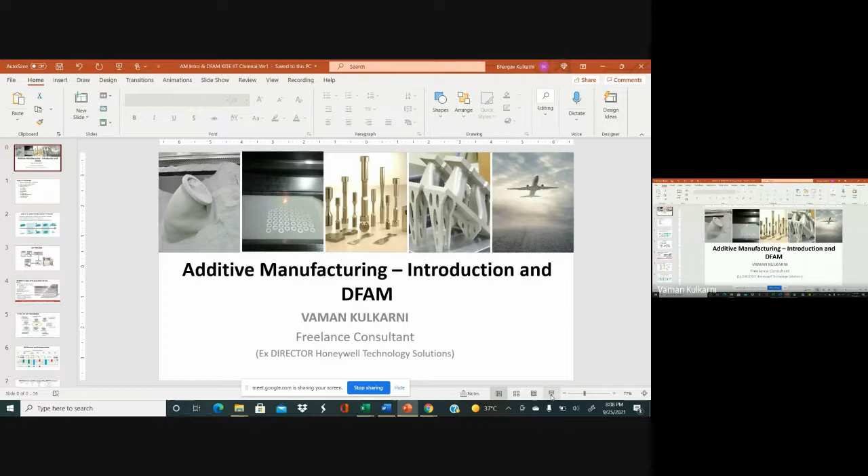In my experience, it was in 93, 94, as part of the Kaveri Engine, we were developing the integrated nozzle actuation system, which has an integrated hydraulic power pack, and it was done through Allied Signal from USA. That is where, in the entire design of a complex pumping system with the housing, additive manufacturing was very effectively used. It's a pump housing with a lot of internal passages and drilled holes to connect them. So it was a very complex part. Multiple times they did the prototyping with plastic material at that point of time, which helped to finalize the hydraulic manifold passages inside that complex housing.

Otherwise, they would have to make that part out of a casting, face the problem, and then go through design iterations to modify it. So really, additive manufacturing at that point of time helped to visualize the part. It is a non-functional part because it is made out of plastic. The original material is aluminum alloy, but it definitely helped in simplifying the design process and cutting down the cycle time. So that was my first exposure to additive manufacturing.

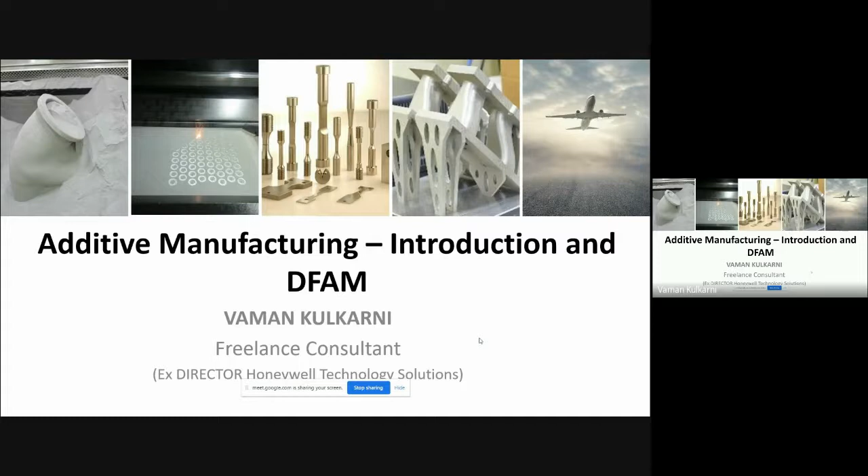Initially, everybody's assumption of additive manufacturing is you just have a machine and the CAD model, you feed the CAD model into the machine, and then you get the finished part. That's what everybody thinks. But as we started looking into it, it is a real technology. So we will get into that and see what additive manufacturing can really do. Definitely there are benefits, there are a lot of applications, but there are quite a few challenges which also have to be dealt with.

So what I will cover in today's topic is we'll briefly look into the additive manufacturing process and what are the benefits and applications. There are different types of AM processes. As I told, initially it used to be called stereolithography, and subsequently we got into laser printing, so we will look into the different types and the materials we can handle, and then applications. Many of the examples I may talk about may be from the aerospace industry because that's where I come from, but they're all very relevant today for other industries, and there are a lot of applications in areas like automobile or the health and medical sectors where it is being very effectively used.

I feel the design for additive manufacturing is very key, especially for the students who are in the call today. They should adapt themselves to additive manufacturing, understanding the design for additive manufacturing areas and the approach they need to follow so that they get the best benefits out of additive manufacturing. And at the end, we'll see what are still the challenges which need to be addressed.

Most of you are aware of the additive manufacturing process. Conventionally, what we do is a subtractive way of manufacturing. You take a raw material and take out material to get to the shape and size we want. But in additive manufacturing, you build the part layer by layer and finally get the finished product. In the process, we are not wasting any material, and you are able to do this directly taking the CAD model as the input. And of course, we need the material with which we are printing. There is a range of materials today: many of the metal alloys, plastics, ceramics, and even composite materials can be printed today with additive manufacturing.

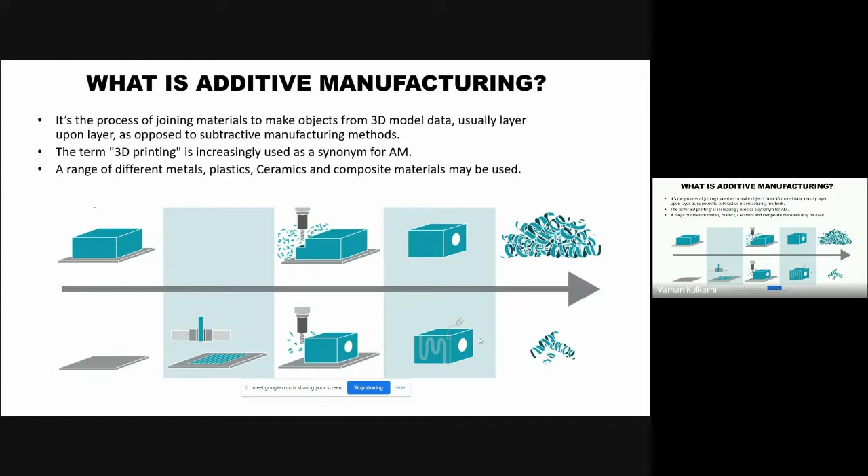The process looks simple, but as I explain it, I will also talk about the complexity involved in each of these process steps. So you have the 3D model, the CAD model you have all been using for creating these models. From the CAD model, we typically have to convert it into a conversion file which the machine interfaces can understand. Most of the machines can understand the STL file. And today there is a very specific format which is for additive manufacturing.

That's the interface which is used. But once we have that file, there is a pre-processing which is involved. This is very, very important. There is a lot of learning which is involved in pre-processing the models. The reason is

as you visualize when printing these parts, they can be printed in multiple orientations. So it can be printed horizontally, it can be printed vertically, or at any other angle. So what is the best way to print this part? That is where the initial pre-processing is involved.

And many of the overhang portions of the component need to be supported, because we are using the raw material, which could be either a liquid or a powder, or even if you are using a solid material, because the way the part is produced, it goes through the different phases of the material. So it needs to be supported. What is the best way to print that part with minimum support?

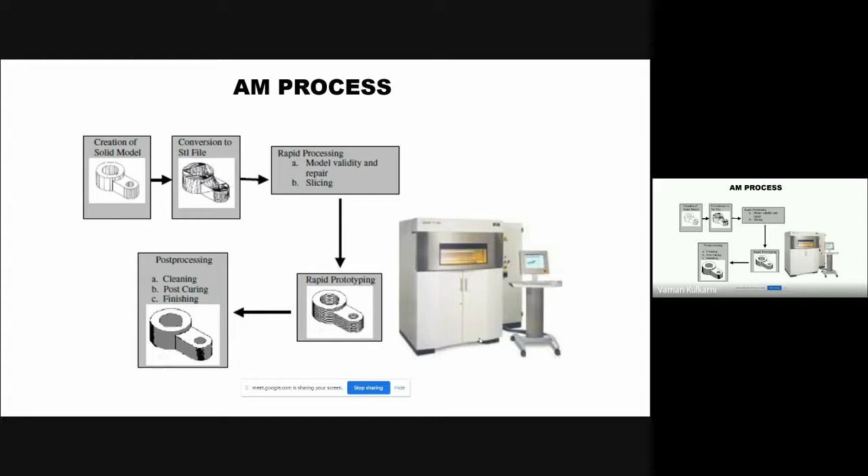So that's the technology and the process which needs to be understood by everybody so that you succeed in building the part to the requirements. So there are quite a few benefits of additive manufacturing. That's the reason why everybody is talking about additive manufacturing as part of Industry 4.0 today.

As part of smart manufacturing, additive manufacturing will be very, very key, because you are able to make a part which can give much better performance, which otherwise was not possible with conventional machining, or even if it was possible, it used to take a lot of time and was not cost effective. But with additive manufacturing, it has become much simpler to achieve those. So there are a lot of innovative products coming out using additive manufacturing.

We'll see some examples. And we can definitely make lightweight parts, either because of topology optimization or because we are using lattice structures. And then we can also consolidate parts. Say earlier you had an assembly consisting of maybe 50 or 100 parts. There are quite a few examples of how that can be completely consolidated into one single part. We'll also see some of those examples.

Definitely we don't need any tools for additive manufacturing, the wastage of material is also very, very low, and we can make a complex part much more easily. And we don't need a large inventory for these parts, because you get an order to manufacture and maybe within 2 or 3 days you can have the finished part ready. So it avoids the inventory management piece of it.

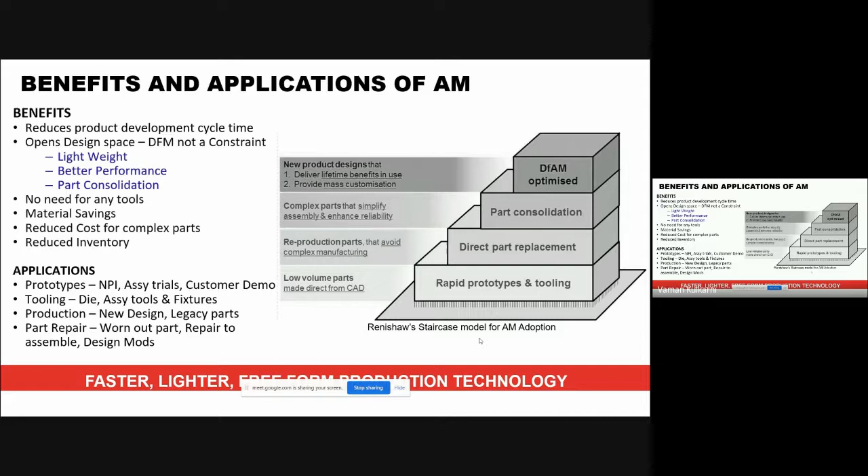But automobile has been using it for all our new product development initiatives, and for high-end automobiles, high-end cars, because the volumes are less, they have been producing production parts out of additive manufacturing. Whether it's metal parts or plastic parts, there are a lot of production applications. The medical industry is the other key one, especially the dental industry, as well as some of the fixtures they want to use. So the medical industry has been using additive manufacturing very, very effectively.

So the different processes involved in additive manufacturing, I'll not get into the details, but I will briefly explain photopolymerization, which is the initial one which started about 35 years back, the stereolithography which I talked about, where the material is in the form of a liquid. And then we use either a light source or a thermal source to solidify that part to the shape and size we want. Because of that, typically this is limited to polymers or plastic materials.

Material extrusion, one of the key processes is fused deposition modeling, normally called FDM, where the material is in the form of a solid wire, and that wire gets heated and melts, and then we move the nozzle to the shape and size we want. It's been very effectively used for nylons, plastics, as well as polymers, but now it is also slowly getting into metal printing.

Direct energy deposition is more like a powder, and you use a laser source to melt it, and then through the nozzle you deposit it on the surface. Direct energy deposition has been there, but it's typically used more for part repair applications rather than full product development.

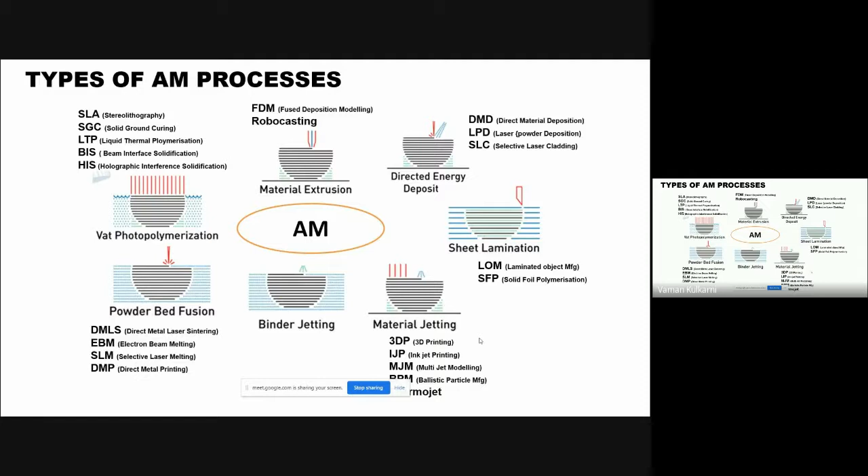In fact, powder bed is also used for some other powders like PEEK or other Teflon-related things, in the form of a powder. So this shows what form the material is in. Green shows that it is in powder form, blue shows that it is in liquid form, and red shows that it is in solid form.

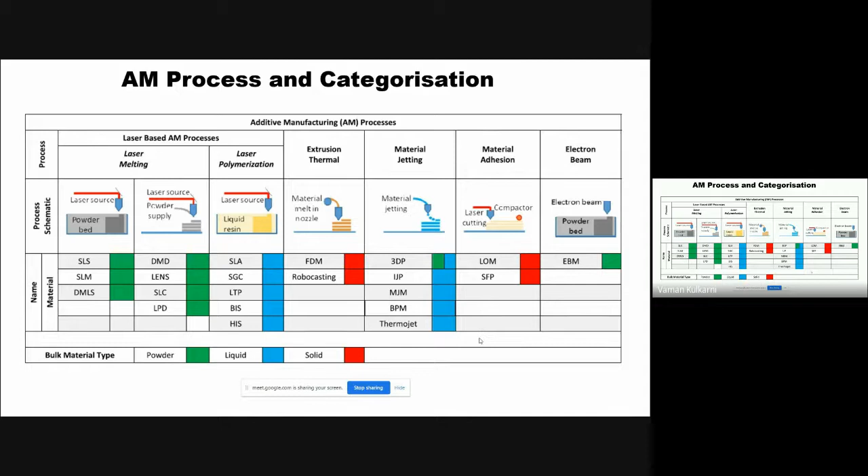So raw material in all three states is being used in additive manufacturing, and in the processes we talked about earlier, we saw how each of these raw materials ultimately gets converted into the final product. I'm not going to talk about this very busy slide on the materials, but there are polymers, metals, ceramics, and composites, and you see the various AM processes listed, and what material we are looking at.

A simple example: for metals, with the SLM process we can use stainless steel, precipitation hardened steel, cobalt chrome, nickel alloys, titanium alloys, aluminum alloys, and maraging steel. So there's a large group of materials, and it is expanding. Today, copper also can be printed through the DMLS process. There is a lot of research happening to get to new materials using this technology. So this is a compilation of that information.

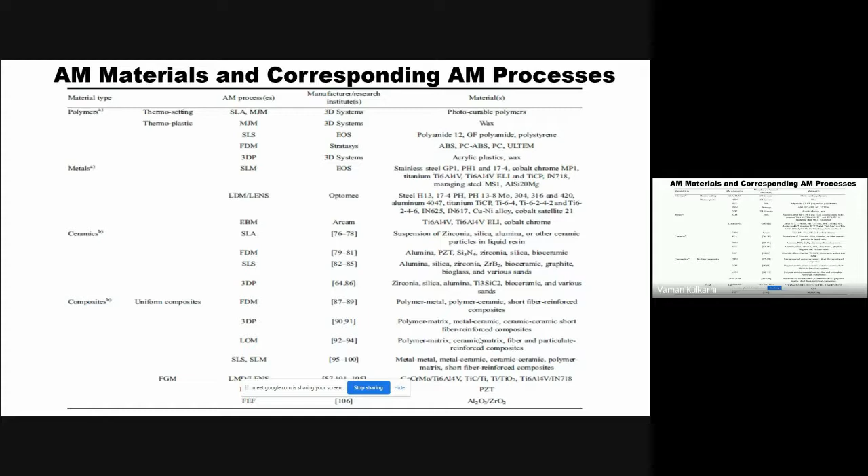Because of that, there are a lot of internal cooling passages, which keep the temperature of the alloy at the level needed. So to optimize the aerodynamics as well as the temperature it can withstand, it goes through 3-4 iterations. Most of these blades are cast. So to finish the design iterations through the casting process, making the prototypes and then doing the testing, it takes almost 3 years.

But with additive manufacturing, you are able to make the blade and then do the testing. In fact, the 4 design iterations could be completed in about 8 weeks, against the 3 years it typically takes. And whenever you go through the casting process, you need to have the tools to make that part.

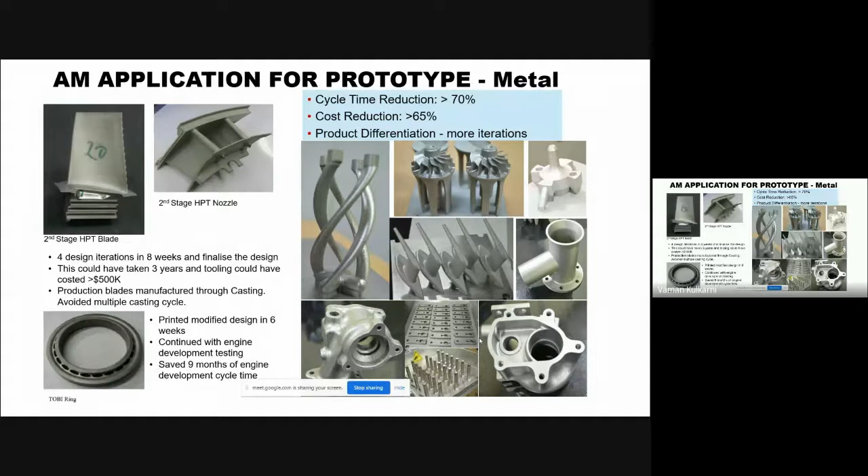A similar example is the second stage HPT nozzle. Again, it sees very high temperatures, and it has a complex geometry. It can be made only by casting, so the cycle time involved is very, very high. There are other examples also seen here, some of the air data probes, some of the turbocharger housing, or the impeller blades. These are all things where additive manufacturing is effectively used for prototyping.

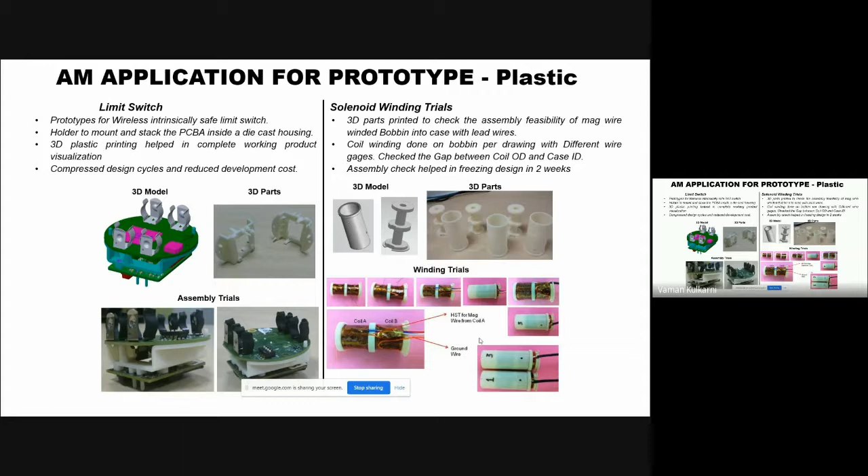In some cases, we may not use the metal material. We may still be good to go with plastic material, and you can go ahead and do the assembly checks, trials, or if you want to do some winding around the bobbin, you can do that and then finalize the electromagnetic performance. As part of Honeywell, we did it for many of the solenoid designs. So this is an area where you use a plastic material, do all the assembly checks and evaluations, then finalize the design and go through your production process.

Tooling is another area where additive manufacturing has helped a lot. In fact, Honeywell has used additive tooling to a large extent. A simple example is a flow mixer, which is required as part of the test facilities to test some of our flow meters. We could make this flow mixer design using additive manufacturing. It's part of test facilities, but it's required to test your flow meters to straighten the flow and other things. So we could quickly do it.

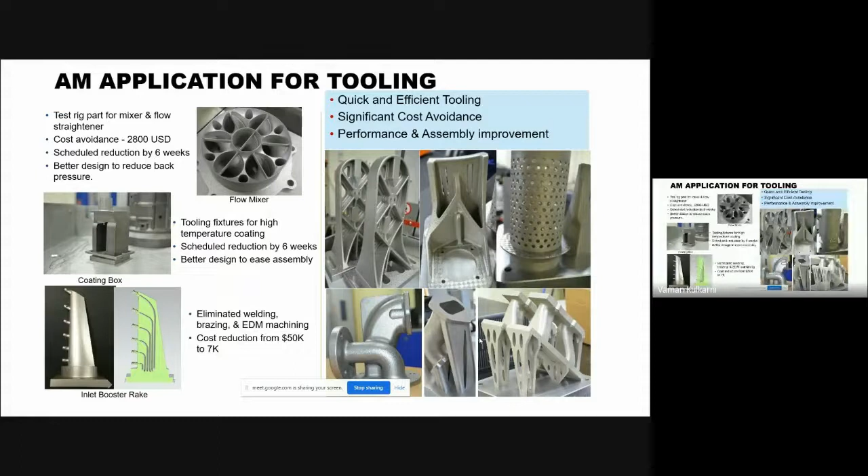Or if you are having a pressure measurement rake, which measures the pressure at different lengths along the blade, we can make some of those rakes using additive manufacturing. A very quick and efficient way to make those tooling requirements, and at the same time, it can considerably reduce the cost. In fact, this is a very good example which industry has adopted. This is called conformal tooling.

Typically, even if you are using injection molding to make some of these plastic parts, more than 50% of the time is used cooling those dies. The reason we cannot improve that is the cooling passages: with the conventional process, they have to be straight holes or inclined holes, but they cannot be curved holes. With additive manufacturing, you are able to increase that cooling rate by having complex cooling passages, and you can improve the production rate by almost 150%.

In fact, this is one of the things we used in one of our safety devices, and we could achieve a 150% increase in the production rate, working very closely with the injection molding supplier to actually implement it.

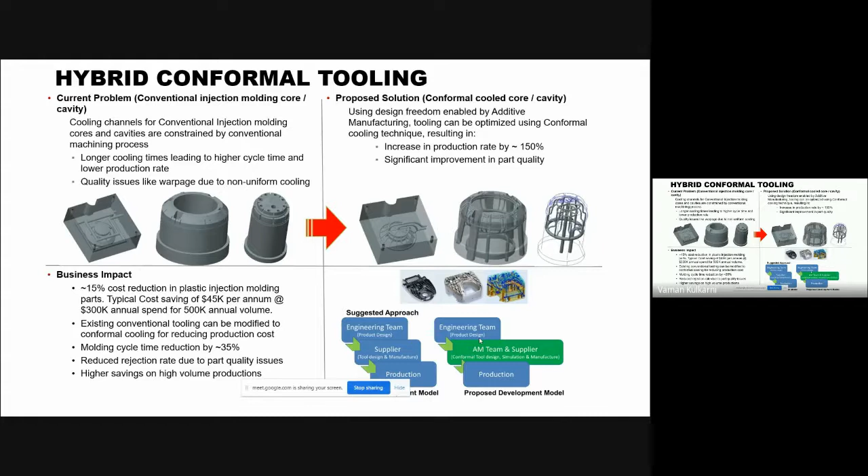Part repair is another area where additive manufacturing can be very easily used. If you have a blade which is worn out, you can trim that worn out part, build on top of it, and get to the final dimensions you want. This is a research process which is getting finalized today, and it can be very effectively used. Another similar area is incremental printing, which we very effectively used on our turbocharger.

In fact, we made this turbocharger for Honda. Then Suzuki wanted the same turbocharger, but their end fittings were different because they needed to package it to their assemblies. If we had to make another housing with different end connection orientations by going through the casting process, it would have taken at least 4 to 6 months. So what we did is we took the existing turbocharger we had made for Honda, took off that existing flange, rebuilt on top of that, and then offered it to the customer.

So what could have taken about 6 months of time, we could give it in less than a month. And they could do all that assembly trials and then test it. And so this helps in meeting the customer needs very fast.

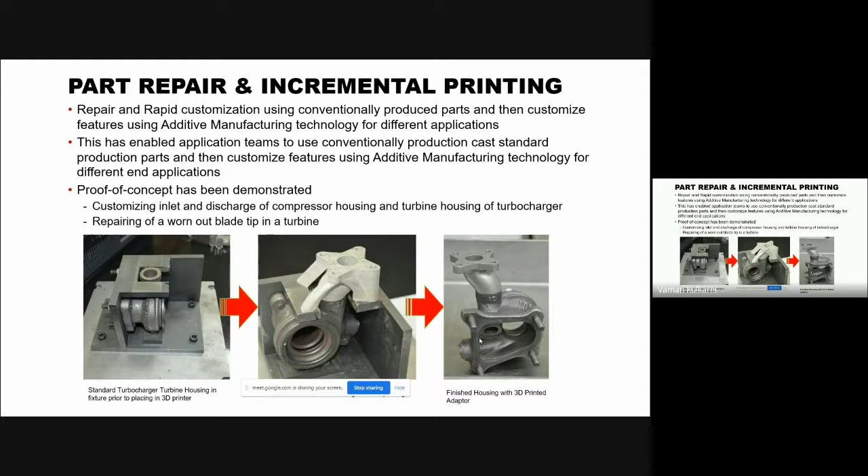In fact, the part repair technology using additive manufacturing has been fast developing in all the MRO shops today, and this is being very effectively used. GE uses it very effectively. Pratt & Whitney uses it very effectively. So it's an area where additive has been very effectively used.

So what is happening in the country on additive manufacturing? First of all, there are a lot of people who have invested to provide additive manufacturing as a service. There are quite a few people available today, and they want to leverage these technologies. I will say that easily more than about 30-40 service centers are available today, including both metal as well as plastic printing services.

Some of the examples I have shown are real industry examples. The high pressure compressor, this is for HAL, which Wipro developed. Similarly, the starting nozzle, again for HAL, was done by Objectify, one of the service providers. And for space applications, this is another feed cluster developed using aluminum alloy. An automotive example is an oil intake manifold in aluminum alloy. They could develop this whole thing in 1 week's time.

A copper heat exchanger: as I told, copper is also now a material which we can print. A lot of research happened, and finally the DMLS process is being used even for copper alloy. So a good amount of examples.

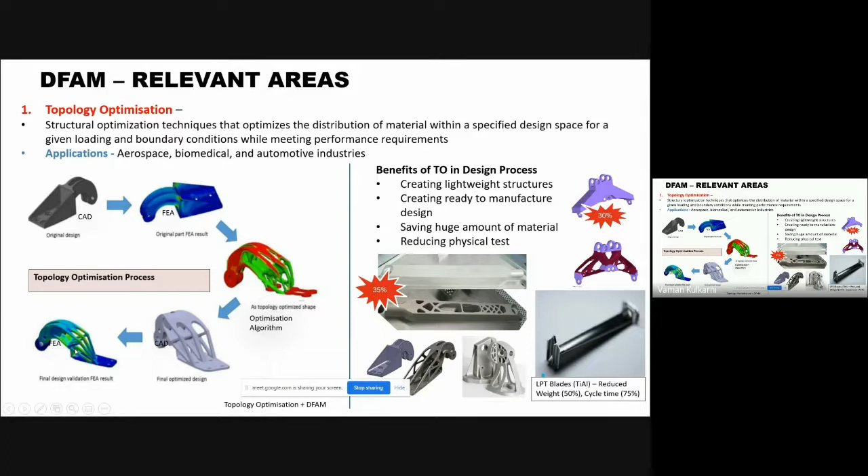And ultimately you make sure that it still meets all the requirements, then you optimize the design, and you again do the finite element analysis, and you ensure that the part is able to meet all the loading requirements, and then you finalize that design. Because whatever shape you arrive at can be very easily made with additive manufacturing. That's where this technology is making the best use of topology optimization.

The second thing is using the lattice structure or the cellular structure. Again, lattice structure is not a new thing, but the usage has been very, very limited because of the limitations of how to manufacture it. But with additive, it has really opened up, and you can have a very high strength to weight ratio, higher heat transfer, or you can even have a negative Poisson's ratio with the shapes you can arrive at. And you can also have better acoustic properties.

One of the examples I am showing here is a duct, the plain duct, which is used to do heat transfer. How can that be improved using these lattice structures? There are 3 structures which we took as an example, and you can see how the heat transfer rate can be increased, and at the same time keep the pressure drop at the minimum.

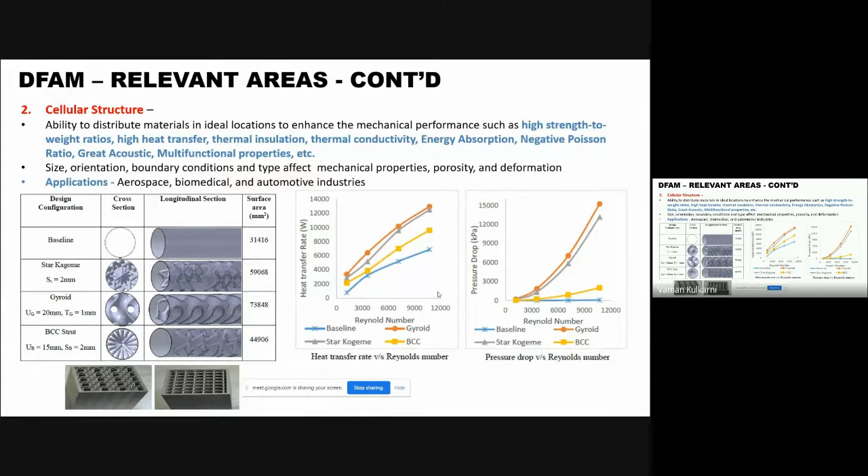So you can see with the yellow line, we are able to increase the heat transfer rate. At the same time, you are limiting the pressure drop. So we can do design iterations around these to get better performance using these lattice structures. And I'm taking heat transfer as an example, but it can even be used for many of the structural elements.

The third thing is the part complexity, which you can incorporate into the design, eliminating the limitations we are looking at when we are thinking of conventional manufacturing.

The aerodynamic shape of any component can be further improved to get a better performance, or you can optimize on the weight, and then you can also embed the parts, especially some of the sensors that can be embedded into the surface while printing itself, and those sensors will give the pressure and temperature parameters as it is operating, and conformal cooling we talked about.

We can also add additional functions. If it is an aerodynamic part, airfoils, you can also use it as a structural component, or the combustors, the swirlers which are there. Apart from the turbulence levels you are looking at, you can also improve the pressure drop levels or heat dissipation. So you can introduce additional functionalities into the parts when you design it, and you can also have

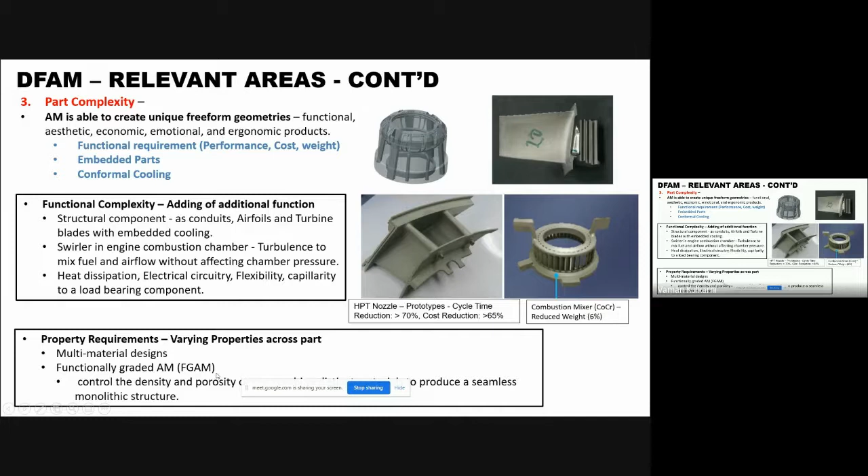the functionally graded additive manufacturing materials which have varying properties across the part. It could be by controlling the density and the porosities, or it can be because of the structure itself, but you're able to achieve these varying properties across the part through additive manufacturing. This is an area where a lot of research is happening today, and there are practical examples being done with additive. So that's the complexities we can introduce.

Part consolidation is another very good example. This is a fuel nozzle which GE developed for the GE9X engine as well as for the LEAP-X, in fact. This nozzle typically used to have 20 parts, and it involved welding and soldering, and the assembly fixtures required to assemble these 20 parts together. But with additive manufacturing, we are able to convert this into one single assembly.

And it has reduced some of the variations which could happen during the assembly, and it has increased the yield for these parts. So this is a part which is in production today. So typically when you want to use additive manufacturing, you don't look at the part, you look at the complete assembly and see how that can be put together.

Similarly, this is a heat exchanger, which is an aluminum alloy part. This used to have 163 parts, but now we are able to make it as one single assembly. So in fact, part consolidation is a big benefit coming out of additive manufacturing, and you should consider it early in your design.

The materials. Materials is a very, very important aspect of the design. We have a list of materials we can do with additive manufacturing, for the polymers, the composites or the metals. So knowing that, we can always select a material which we can adopt using additive manufacturing. In fact, you can also achieve a multifunctional optimization of materials. And you can also look into introducing lattice porosities to arrive at the material properties you are looking for.

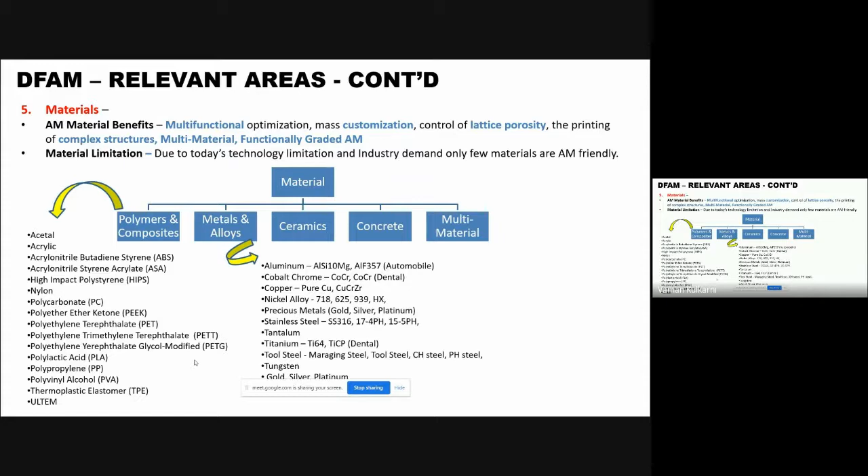There are still some limitations. Not every material can be printed using additive manufacturing. We need to understand that limitation, decide the material, and then get going with the additive. As part of the printing process, we talked about how support structures are unavoidable. We cannot avoid them. So we need to decide on the orientation and the way we print that part. And maybe during the design itself, you look at how it can be printed with minimum supports.

And these supports also do the other function of heat dissipation. So we still have to have the supports so that enough heat dissipation happens, so that we will not have thermal cracks induced by the thermal cycle the part is subjected to while printing it. So we need to optimize the support structure, and there are a lot of tools available today for understanding the AM process and how the support structures can be optimized for a typical AM process.

The other design improvement is a very simple example, very easy to understand, so that's why I included it. Typically, if you have a flow duct, the T duct, with conventional methods you will have straight holes. But with additive manufacturing, you can have these curved holes which give a smoother flow, and there are no sharp corners. And the circular holes can be converted into oblong holes, so that it is best suited for additive manufacturing.

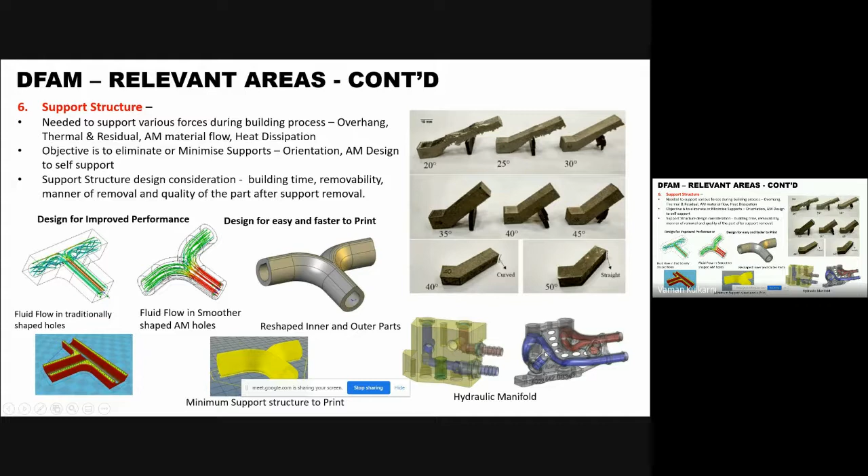So that way we can optimize the geometry and then optimize the way you print it to be best suited for additive manufacturing. This is another example of a hydraulic manifold, how you would have done it normally with conventional manufacturing and how we can do it with additive manufacturing. You can see more than 50% reduction in weight we can achieve, and at the same time we can get lower pressure drops and smoother flows through the hydraulic manifolds. So these are good examples of how we can optimize the design for additive manufacturing.

There are certain things which are helping the supply chain. We talked about part consolidation, how the assembly time can be reduced, assembly fixtures can be reduced. I'd like to spend a little more time on the smaller production runs and the turnaround time. This is one of the examples we had in Honeywell. This is an engine which was made in the 60s and 70s, the ATF engine.

So the bearing housing, which is a cast part, was being done by one of our suppliers, and he had those supply tools, and then that supplier wound down his shop about 5-6 years back. We used to have a lot of difficulty in getting this part done because the casting tools are not available, and if you go to a new casting house, it will take another 2 or 3 years to certify that process and the tools and then get it done.

And this is true with many aerospace things. Typically they have a very long life. This engine, which was done in the 70s, is still in service. We are not making new engines, but we need to support the existing ones. There are still about 12 aircraft in service, and we need to provide that support. So finally, we could make this out of additive manufacturing, get it certified by the FAA authorities, and implement it into the production line.

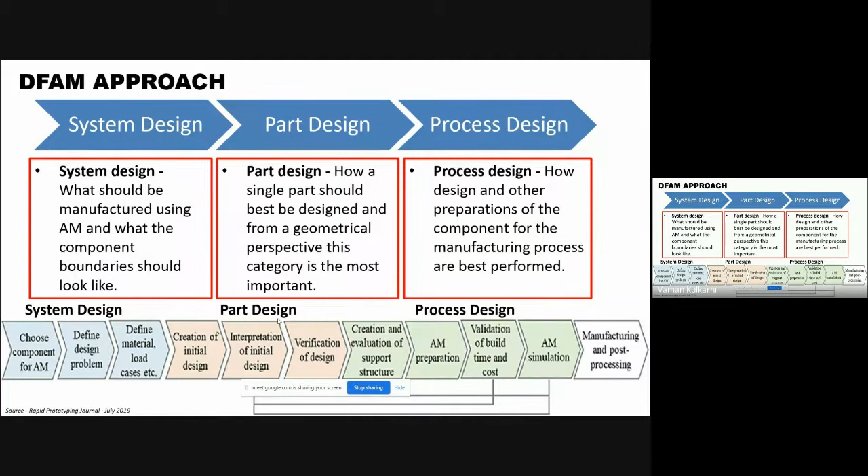So what are the challenges? Because we print this part layer by layer, there is a minimum layer thickness we can do. Typically the layer thickness varies from 20 microns to 80 microns depending on the complexity of the part we want to achieve. So because of that, the surface roughness we can achieve, or the dimensional tolerance we can do, is still limited.

Either the diametrical or the linear tolerances, what we can achieve is less than 50 microns, is still difficult. So we may have to overcome that by doing some of the post-processing. So that's the technology-driven thing.

The second thing is the build quality. The build quality and its consistency is one thing which we have to establish so that it is acceptable to the applications you are looking at. Aerospace may have very, very stringent requirements for these things.

Because of the thermal cycles it is going through, there are a lot of residual stresses which are inherent, and we have to relieve those stresses by going through a stress relieving process. We also have to ensure that a proper heating and cooling cycle is followed so that there are no distortions or thermal cracks. So for most of the bigger parts, it's a process and a technology which has to be established to get to the finish we want.

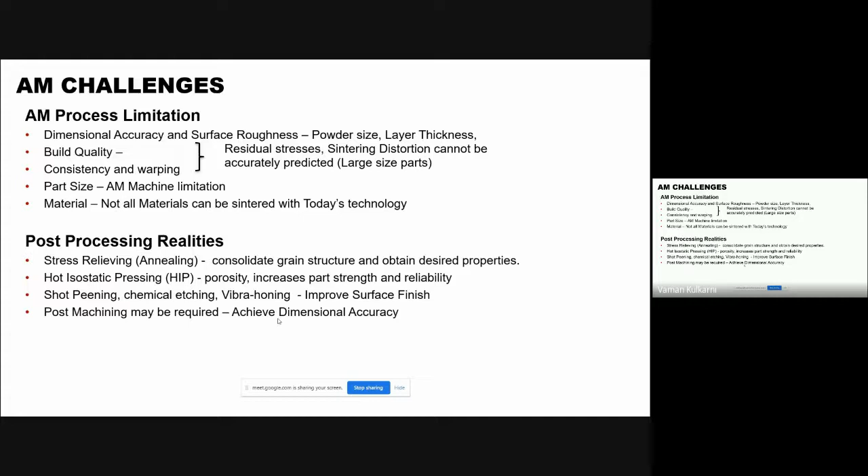There are a lot of cost models which have been developed by many industries. And we have seen that if you consider end to end, there are quite a few cases where additive is definitely cost effective.

So this is my last slide. What is the forward path for additive manufacturing? The industry has started accepting, and in fact it's already in production, that 3D printing is a reliable manufacturing process. Maybe to get additional certifications, there is additional data we need to furnish today. But slowly, once standardization happens, with minimum data we should be able to get certified.

Designers should start looking at DFAM, which I talked about, so that they get the best benefits out of additive. And in fact, the students whom we are talking to today need to be aware of it and get maximum exposure to how it can be done, so that the designers are fully ready.

Then we need to have the necessary training for the workforce, which is very, very important. Today we feel that there is a gap between what is being taught in the universities and schools and the practical things which are happening. That bridging needs to happen so that the workforce is ready to be used by the industries.

And once we have the skilled workforce, we will definitely have more and more innovative products using additive manufacturing, which we could have never thought of 5 or 10 years back. Those things can be implemented through additive manufacturing.

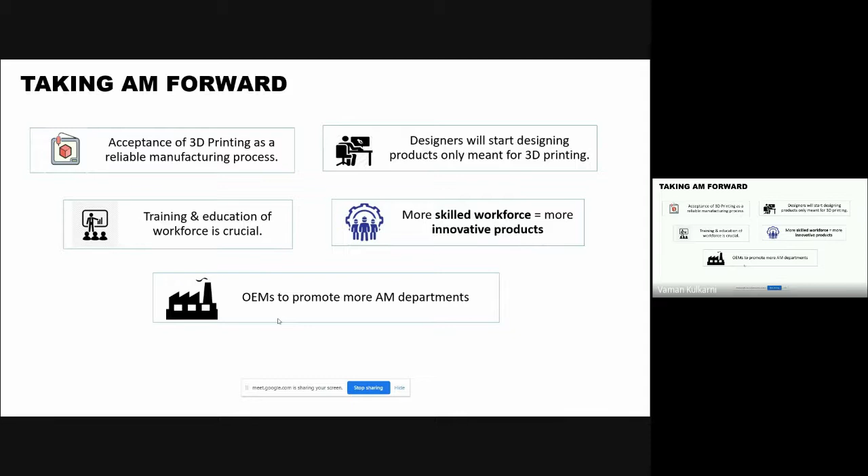So that is where this technology is going to be in future. So with that, I come to the end of my talk. So if there are any questions, I don't know how much time we have, Srikanth or Muthu. So based on that, we can decide.

Thank you, sir, for a very informative presentation, especially highlighting the opportunities available in this area, and also bringing about the importance of the design process required. So I request the participants to raise their queries or questions on this topic.

Sir, I am Professor Rajadurai, Professor from MIT campus, Anna University. Basically, I am a metallurgist. So thank you for the wonderful lecture. All along, this additive manufacturing, originally we thought it is only a type of rapid prototyping, where you can make a component as a showpiece to show to the customers. But whether it is possible to make a realistic product that could be used in a component where some amount of load is being transmitted, that is always under question.

And particularly conventional metallurgists like us, we strongly believe you have to minimize whenever you want to melt and resolidify. You melt a metal, particularly reactive materials such as aluminum, titanium, they will have a hell of a lot of problems. The property of metallic substances depends upon the internal structure. So our worry is how to have a clean melt and clean solidification, so that the component could be realized without loss in property. You may obtain the required shape, required dimension, everything is possible. But titanium and others are highly reactive. So you need extreme care, very clean environment, evacuated or inert conditions, which will add up to the cost.

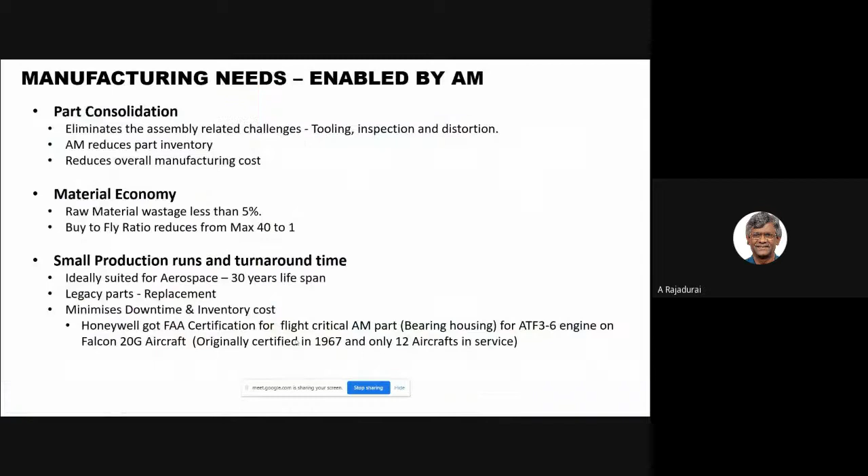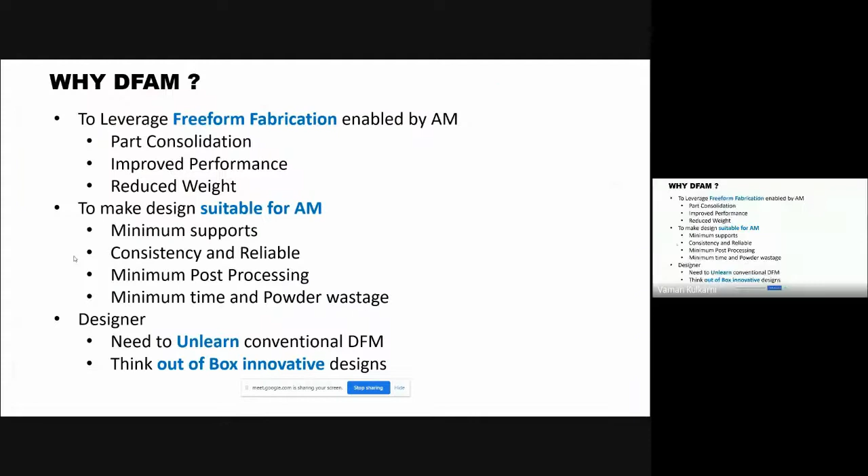That's what I really wondered, how they could make titanium 6Al4V, and that too a very vital component like a compressor disk. They are very vital, no? They are normally forged, heat treated, the microstructures are tailored to meet the requirement. But by simply additive manufacturing, it is very difficult to achieve the required microstructure. The concern is very true, sir.

In fact, it goes through a material testing process. So we build the coupons, depending on the orientation, the way it is built. We build it horizontal, vertical, at an angle. And then we subject it to tests; it could be a tensile coupon, a fatigue coupon, or creep. So we do a lot of material testing. There is a lot of material data already provided by the machine suppliers we are using. For example, EOS or Concept Laser, or even Arcam, which uses electron beam melting, have already done quite a bit of material characterization on these parts.

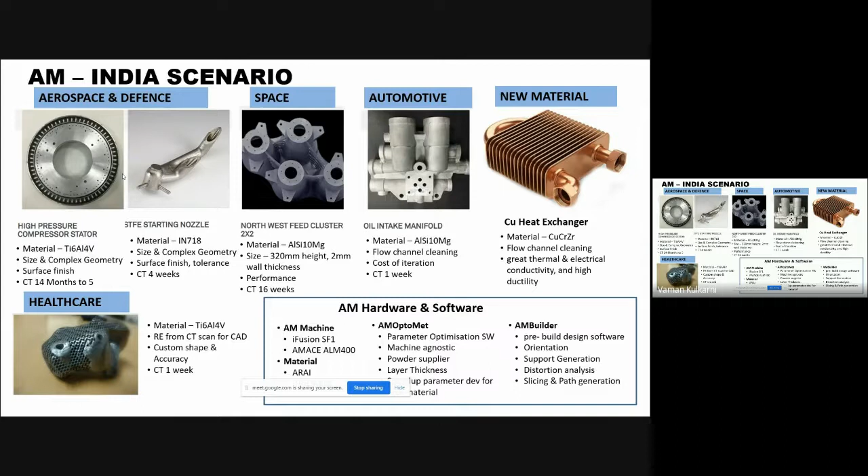No, thank you. I think we can just discuss. Thank you, sir.

That's what we normally used to say. The mechanical engineer sees only the superficial property, only the size and the shape. But the metallurgist sees the soul of the material. We see inside the material and look for the internal conformity. So really, this process is very good for getting the external features. Shape and size can be obtained effectively, but for the internal microstructure, particularly for reactive materials, a lot of research is to be done.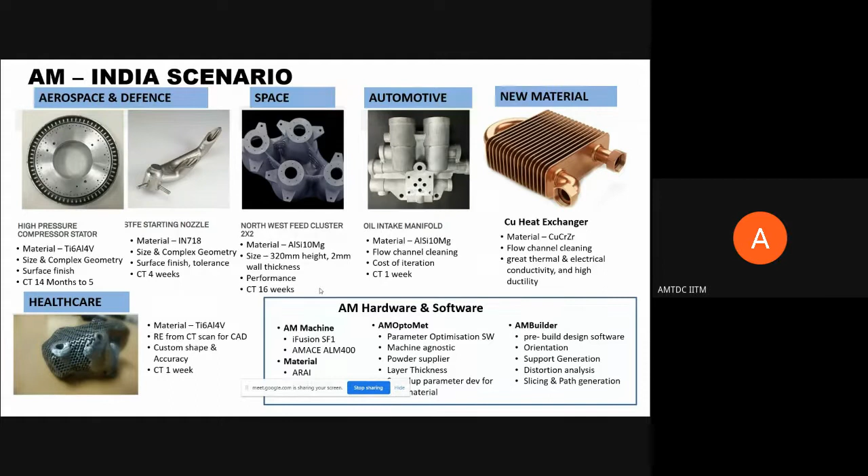Our John was raising an opinion: hesitancy to employ AM is due to non-consistency in the product, as it involves many parameters that influence the process. Some parts have more porosity and some have less porosity.

Sir, your voice is not so audible. Please, sir. Yeah, I think John was making a comment on the process. Maybe Srikanth, you can read it out. Yeah, I got it, Srikanth.

In fact, that is the consistency and the reliability. How to make sure that if you make 100 parts, every part will have the same consistency? That's a real concern based on what some people have physically seen and observed. Mostly, I will say that in the complete process of building that part, right from the source of the raw material to converting it to a finished part, somewhere it could be broken. Then these things will definitely happen.

We were also facing a similar problem about 5 or 6 years back. One example was the fuel restrictor. We were able to build it successfully here in Bangalore, and when we gave the same design to our friends in the US, in Phoenix, they were not able to build it successfully. We gave them the entire process parameters, everything, but they were having some difficulties. So it was a real question how that could be answered.

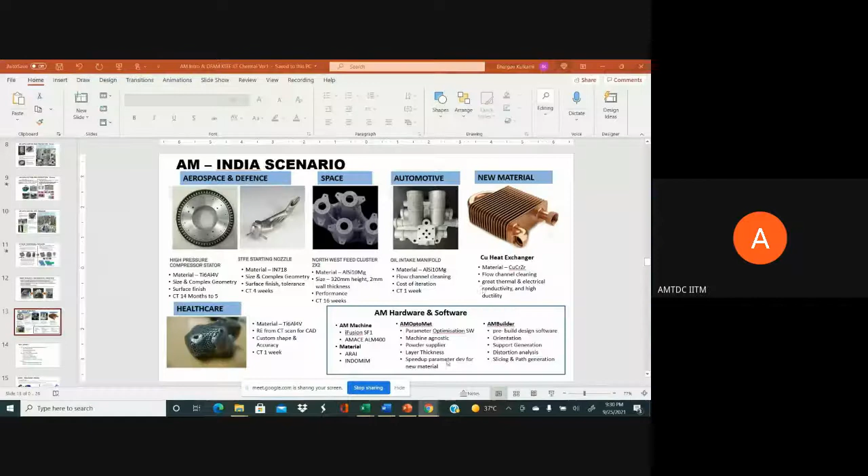Thank you, sir, for a very enriching presentation on additive manufacturing, its adoption in different industrial sectors and how it can further be used. With the availability of smaller plastic-oriented desktop machines, students can easily use them and explore for themselves the power of additive manufacturing.